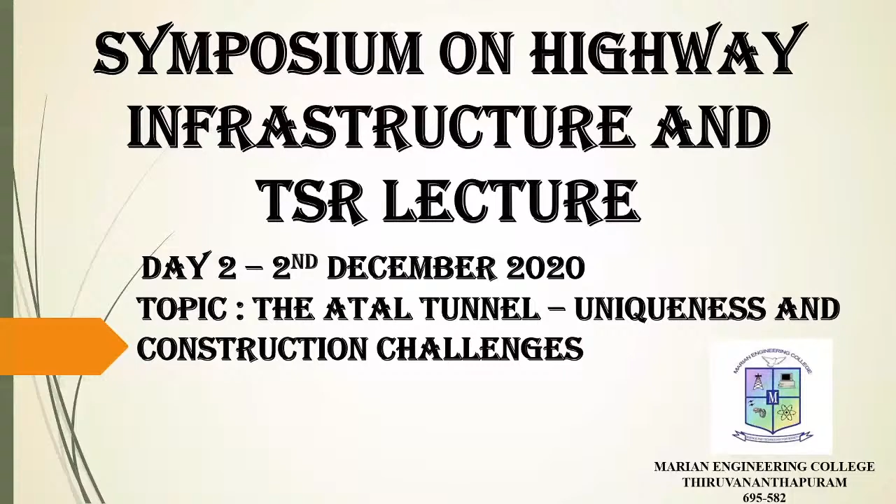As I mentioned earlier, today's session is on the topic the Atal Tunnel: Uniqueness and Construction Challenges, handled by ER Sunil Vasudevan, who is the PMC of the Atal Tunnel Project, a techno-legal expert and former CEO of D2 Consult Australia, and will be chaired by Dr. K. Balan, President of IGS Trivandrum Chapter. He is a postgraduate in geotechnical engineering from University of Kerala and has specialized in subsoil investigation and design. He has designed and executed several projects using natural geotextiles. Currently, he is the Vice President of Rajdhani Institutes of Science and Technology, Trivandrum. This session will be co-chaired by Tinu Krishna S., Vice President of IGS Student Chapter, Marian Engineering College.

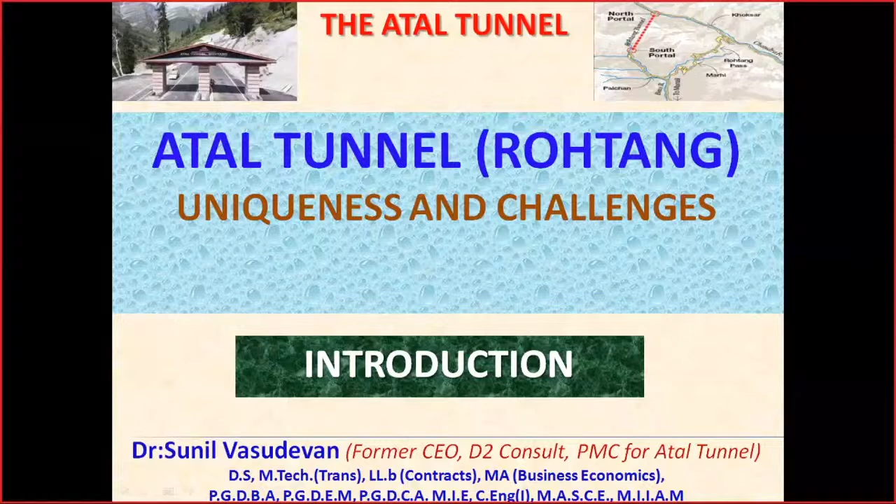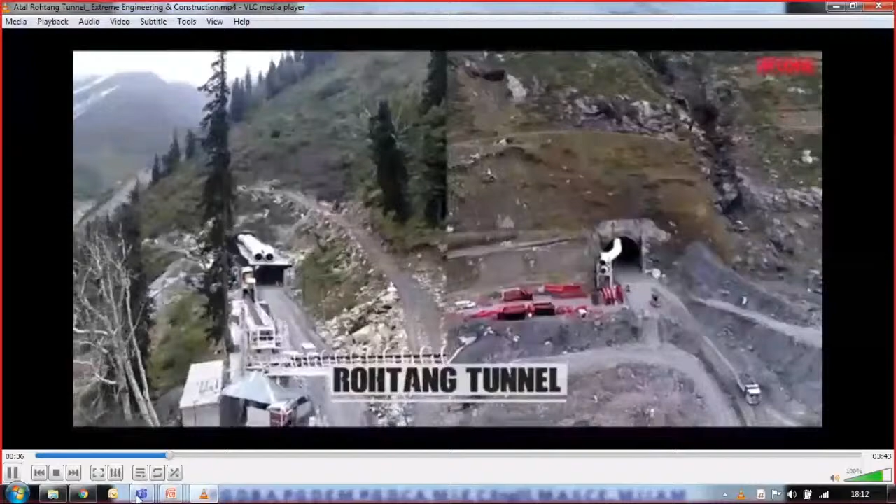Let's begin with a video, just as an introductory video. Here we go. I hope you can all see the video. There's no sound for the first few seconds. It's about a 3-minute, 45-second video produced by the contractors of the Rohtang Tunnel—one of the contractors, of course. Something went wrong with the video, I'm sorry. We'll come back to that.

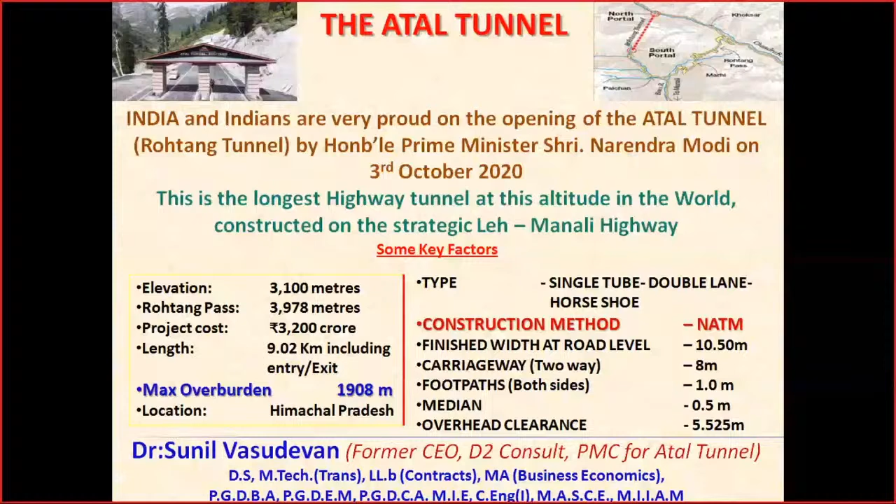This picture shows the finished tunnel—you might have seen this in videos or on public platforms. The Prime Minister inaugurated it. This is the first entry. This is what I think you might have noticed mentioned about snow galleries in the video. This is a snow gallery constructed just before the entrance of the south portal, to prevent snow from covering or blocking it. You can see it comes like this and takes a sharp right turn and goes inside. This is what you see inside now.

So in the small figure also you can see that the road comes here, takes a sharp right turn, and goes across under the mountain.

This relief map gives you a 3D idea about what we have just seen in the video. This is Manali town, and from there about 14 kilometers up we have the tunnel started. This place is called Palchan, from where the present road is. From there you take a right turn and go winding up, go down. This is the Rohtang Pass, the topmost portion. Then go down to the other side and go like this to Leh. So that is the route.

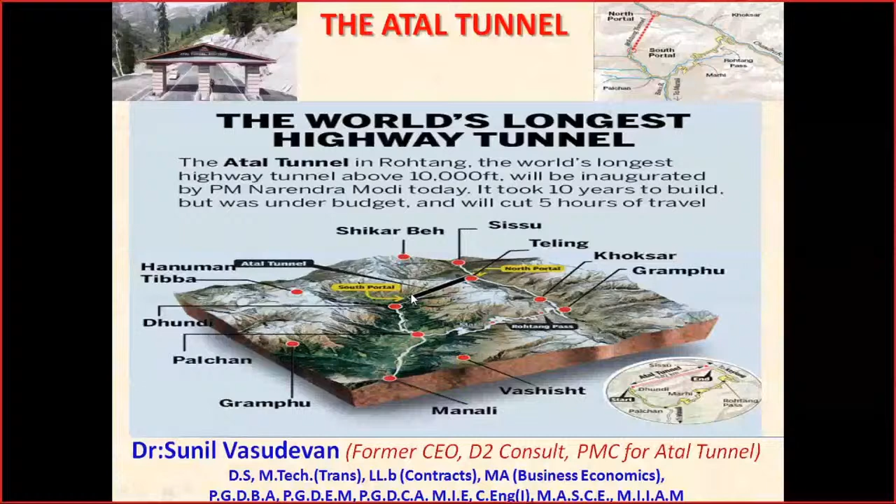So let's have an overview of why this tunnel was made. This is on the Leh-Manali highway, which is number 3, and socially, strategically, and from a national defense perspective, it is very important.

This is crossing the Pir Panchal ranges. The ranges of Himalayas we cross here are called Pir Panchal. Earlier it used to take 5 hours to cross this 46 kilometers, but now you can just zip through in 10 to 15 minutes. So that is the benefit of it.

It is not only beneficial for the general public, it's also very important for our defense purposes. So this tunnel is strategically and defense-wise also very important.

The idea was mooted in 1960 itself, when Jawaharlal Nehru initially thought about this. When the Jawahar Tunnel from Jammu to Kashmir was made, even at that time this was considered. Even the Geological Survey and many other agencies surveyed this and prepared basic feasibility reports.

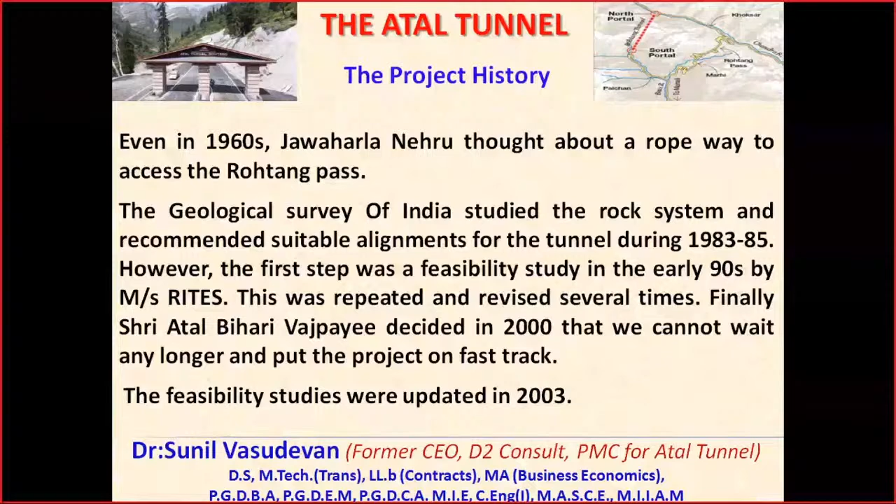And again, it was given to RITES for a feasibility report. But in 2000, our then Prime Minister Mr. Atal Bihari Vajpayee decided that we cannot wait for studying, we cannot sit on it, we need to do it very quickly. So he set up a special project under the Border Roads Organisation with a chief engineer to head this. Based on his decision, the feasibility studies were updated again in 2003.

So the final feasibility study and the DPR for the tunnel were provided by SMEC of Australia, and then this went to bid, and the contract was awarded to Strabag Afcons JV. Strabag is an Austrian contractor. They have done hundreds of tunnels in the Alps. The Alps are climatically more or less similar to the Himalayas, the tunnels built there in snow and very tough conditions, except the geology - which is different. So SMEC were the design consultants, and also appointed as advisory consultants during construction.

The project, as I told earlier, the project management consultancy was entrusted to D2 Consults. I was the CEO of D2 Consults, with my office in Delhi.

So the construction started in June 2010 with the first blast. Our then Defense Minister Mr. A.K. Antony, along with Mrs. Sonia Gandhi, was present for the function.

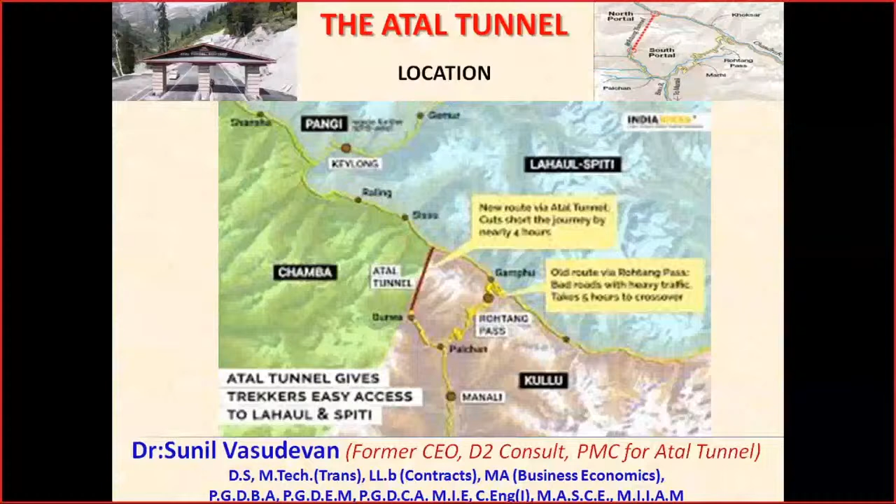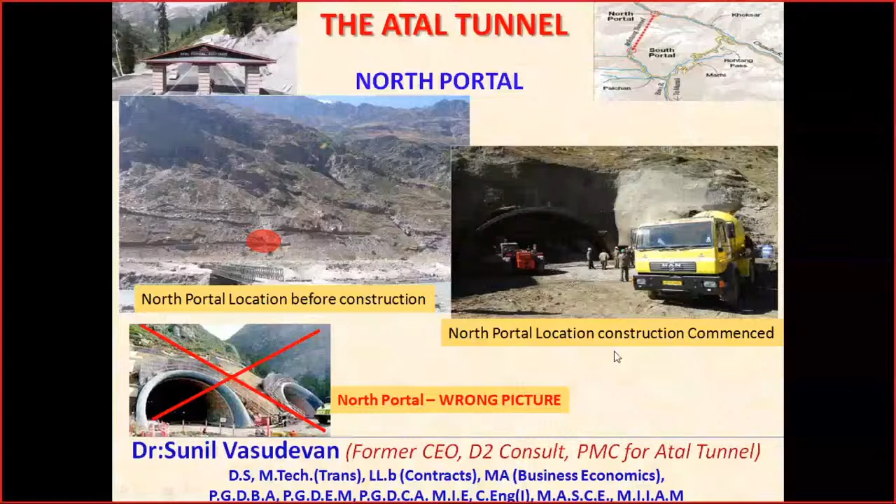This is the longitudinal section of the mountain where we have built the tunnel. It starts from the left side. This is the South Portal, and this is the North Portal. This is the tunnel. So what you see here, you would understand how much overburden is over this. It's huge. The maximum overburden is...

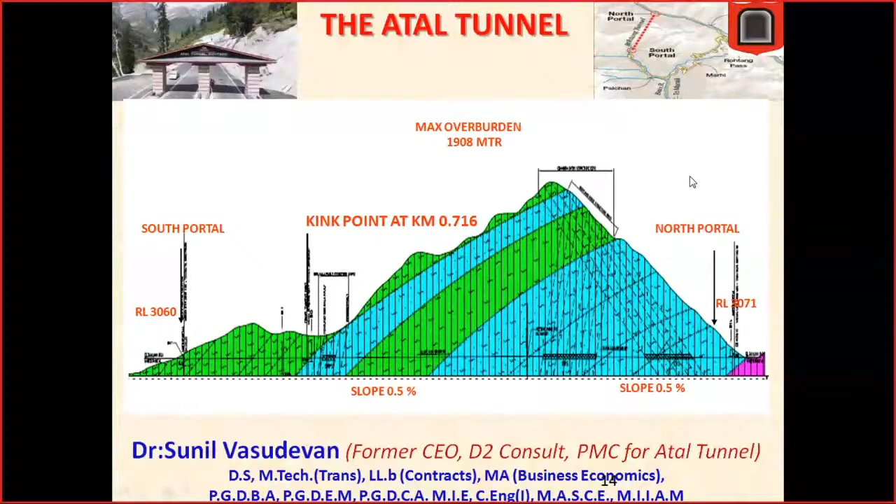1,908 meters at this point, which means almost 2 kilometers of mountain stands above the tunnel at this portion. This is not very common in tunnels, only in some, not all tunnels. Also, the geology is very treacherous. We cannot predict what's going to happen when. So that is one of the major challenges.

These are also some technical matters, just for academic or statistics purposes. The maximum overburden is this. I have included this so that if anyone wants to refer to it at a later time, you will get some statistics.

So let's talk about the challenges we faced. One is high altitude - okay, we can tackle it, no problem. Inclement weather, we can tackle to a certain extent, because it's either snowy or rainy. I don't think there is even a single day without rain or snow. It's always wet there.

The speciality of this location, the Manali, Himachal and Himalayan region, is that the weather changes any moment. At 9 o'clock you'll see good sunny weather, shining like anything. Within 15 minutes, you'll see clouds gathering in the sky and either a snowfall or rain coming. So it's the most unpredictable weather conditions there, and we have to be ready for everything.

Heavy snowfall is another challenge. Winter starts from mid-October or November and continues up to mid-April. So these 6 or 7 months, it's severe winter, and December, January, February are horrible. I'll show you some photographs later so you get a feel of what the Manali area looks like in winter. Then another challenge is that the area is prone to avalanches and landslides, because of the geology and the climate both.

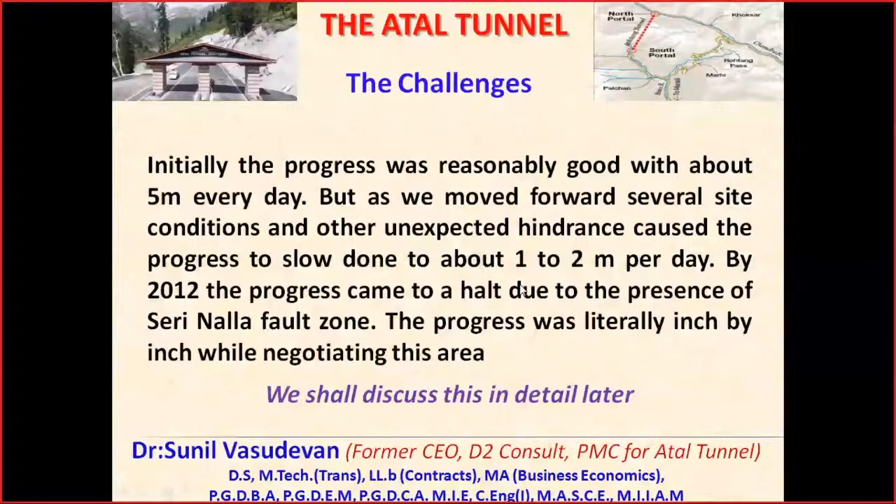Suddenly, one day after a blast, there was a big flow of mud, water, and everything. Nobody was injured, there was no casualty, but from that day onwards, the progress was almost nil for some time. We couldn't even move an inch. Then we tried a lot of modern technical methods, consulted many experts worldwide, internal and external, geologists, everybody. Slowly we resumed construction, and the progress was literally inch by inch, where we used to blast and go 5 or 10 meters a day. Now it is about half a meter or a quarter meter, something like that. Anyway, I'll discuss it later.

As I said earlier, one of the problems was heavy snowfall. There were many occasions when staff had to be evacuated by helicopter because they got caught. The road, because of an avalanche or snowfall, gets closed, and workers, officers, or staff get caught on the other side, so we had to get the help of helicopters.

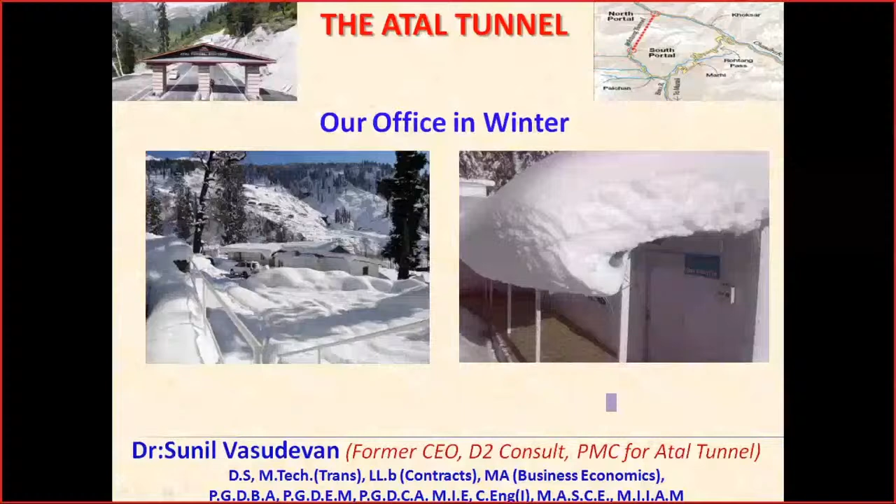This would give you some idea of how we were living or going through the winter season there in Manali. The left side is our office, the office of the chief engineer and the officers of the Border Roads Organisation. On the right side, you can see this snow lying on the roof is just one night's snowfall, not accumulated through days, just one night. Yesterday it was clean, and today you could see this much, more than a meter high snow. So this is the condition there.

This is how Manali town looks. The earlier pictures I showed you were our office, which is around 14 kilometers from Manali town and about 1,000 meters above Manali town. This is Manali town, and this is how the people of Manali town live in winter, just to give an idea about it.

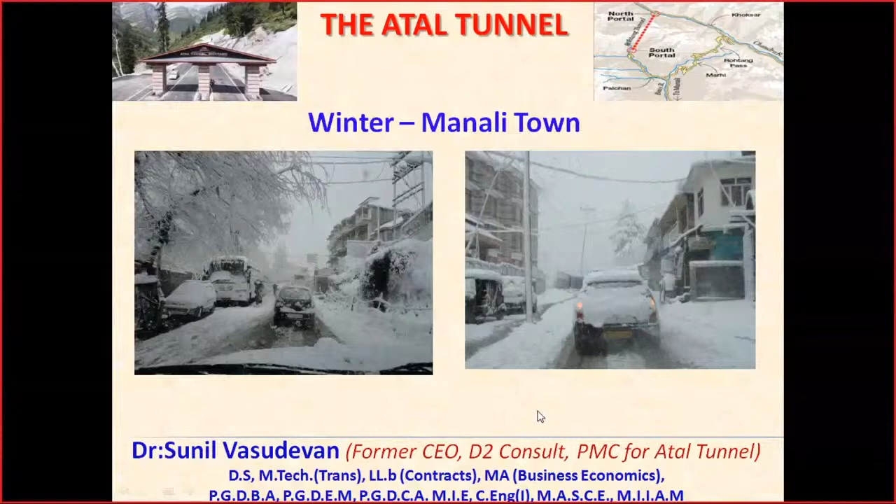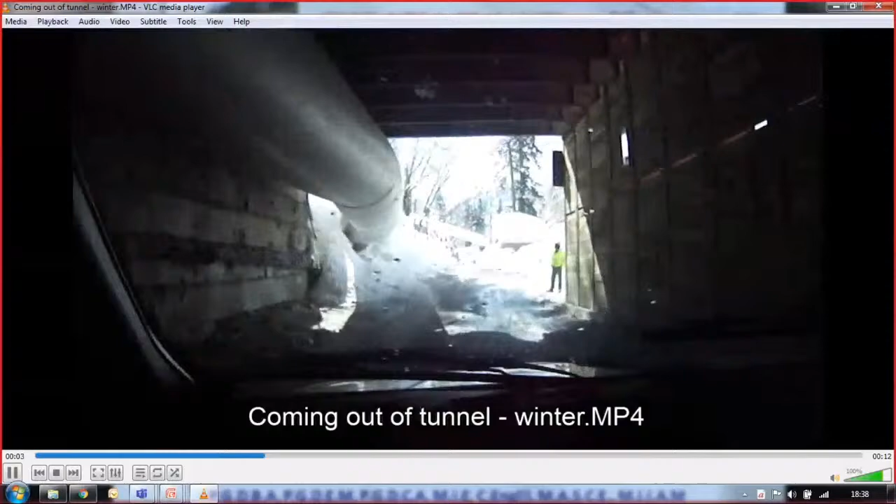This is the road going to the tunnel, and now see the difference, how different it is inside the tunnel versus outside in winter. This video comes from outside the tunnel in winter. I hope you got an idea about the winter there. Inside the tunnel it is very hot and humid, while we wear sweaters and many layers of woolen clothes outside. Once we move into the tunnel, we start sweating, so we have to remove all these things. That is the change.

Now let's talk a little about the geology. I think yesterday in a presentation, the expert talked about the formation of the Himalayan mountain range, created as a result of the push between the Indian plate and the Eurasian plate, the two tectonic plates. They say it started about 50 million years ago and continues even today. 225 million years ago, India was a large island near the Australian coast. It moved into the Eurasian plate and hit it, slowly pushing toward the China side, and the bulge formed is the Himalayas.

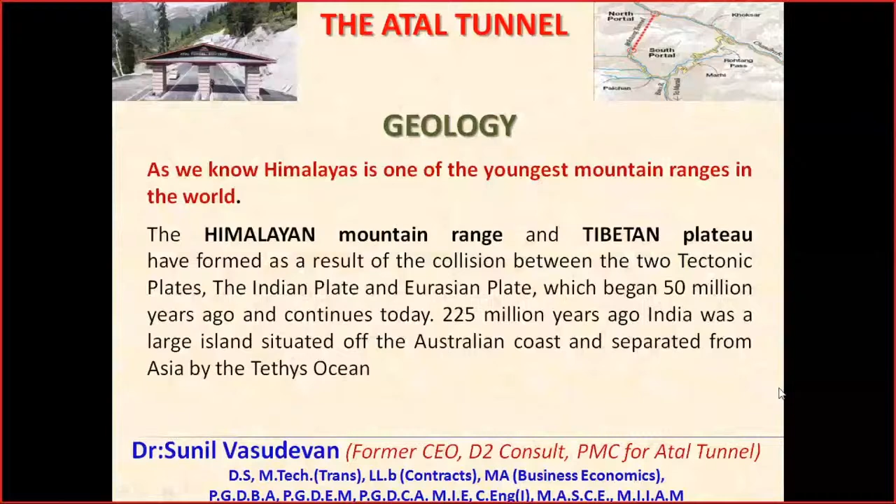It's called one of the youngest mountains because it's still growing, maybe still in its infancy, whatever it may be, but the height is still increasing. That is what we could read in the public domain.

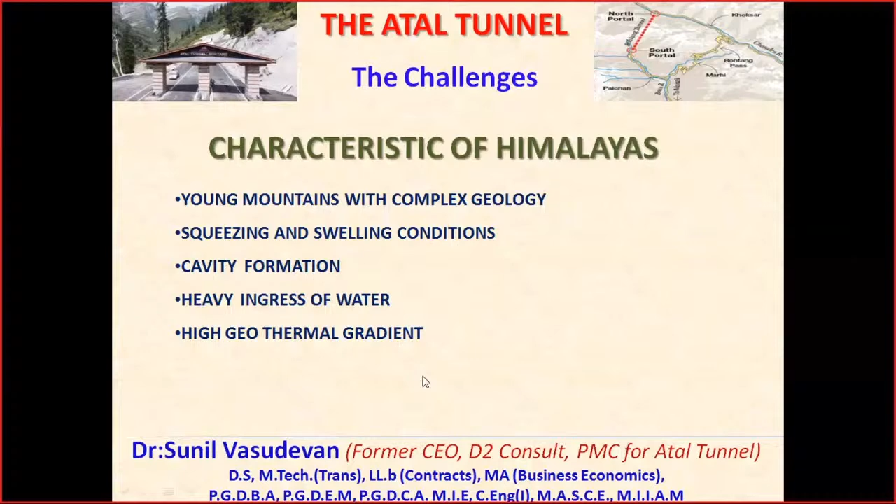The geology of this location consists of quartzites with schist, quartzite biotite schist within dense phyllites. This forms the geology of the mountain in this area. The characteristics are very complex because squeezing and swelling conditions are a big issue, along with cavity formation within the rocks due to shattered and sheared rock. The ingress of water and the geothermal gradient is very high; it increases very steeply.

Now let's talk about the Seri Nalla fault. The present Seri Nalla fault is at about chainage 2 plus 250, that is 2.25 kilometers inside the tunnel, about 250 meters above the tunnel top. What happens is the ground under the Seri Nalla has shattered and sheared rocks and gravels, and water seeps through it. A fault zone is formed, and the tunnel crosses through this fault zone. So from this chainage 2 plus 250 onwards, water from the stream above comes into the tunnel, carrying a lot of mud, rock, and everything else.

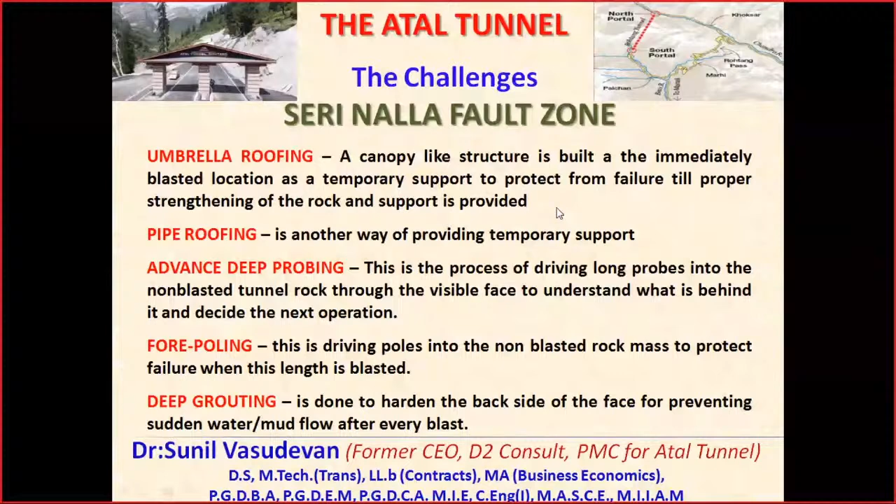So the problem we have seen is that the rock quality is very poor, as I told earlier. The highly fractured rock mass with a number of shear seams and shear failure. And the geological discontinuities have also caused a problem, as they are parallel to the tunnel axis. So when we are driving like this, these discontinuities or faults are parallel to it. That is creating a lot of problem, because we have to take care of it all along the way.

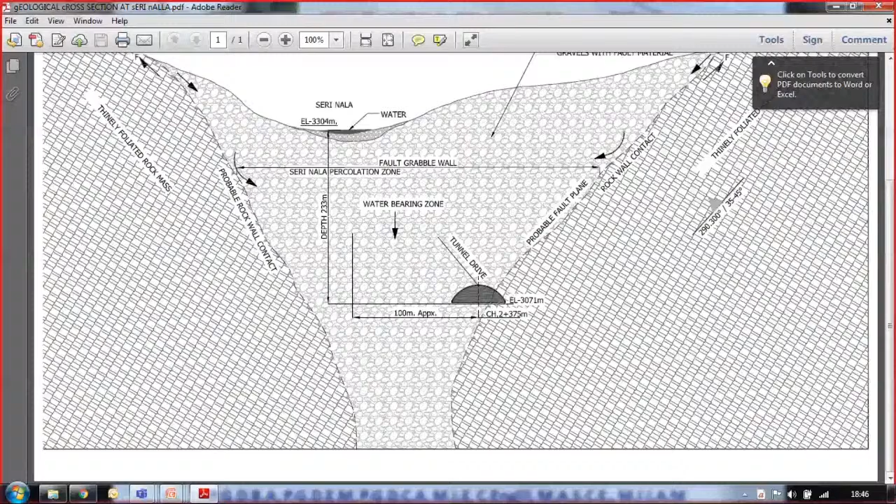So we have our tunnel somewhere here. So all the water seeping through this gravel and everything enters the tunnel at this location. This was the problem we faced.

Now let's discuss in a few words about two different tunneling methods. Maybe students who are interested in tunneling as a subject may be interested in this. So basically we have two tunneling methods. One is the TBM method, done by a big machine called tunnel boring machine, that is TBM.

So this method is very costly. And then this is the drilling section, and behind it what you can see is a lot of other things going on behind this.

That is, even this is drilled, and through this the muck comes out. Trucks come inside, and muck is taken away by all the trucks, then other trucks bring in the linings, and these concrete linings are fixed as the last thing. So this is gradual, the whole thing gradually moves forward.

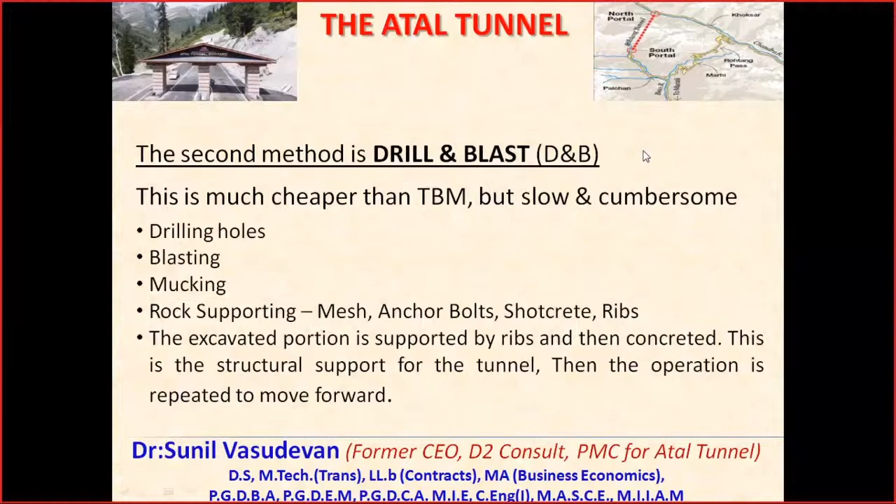Now when you come to the New Austrian Tunneling Method, that is NATM, this is a particular or modified type of drill and blast. Even though it is called the New Austrian Tunneling Method, there are other names for it also, like sequential excavation method or sprayed concrete lining method.

What is important from the engineering viewpoint is that in the normal drill and blast method or TBM method, the load of the surface or rock mass is taken by the structures we build after drilling it, after making the hole. But here in the NATM method...

It utilizes the strength of the rock mass itself, like an arch. The arch supports by itself. You can just do a brick arch, just like the arch shape, and that is what supports the whole structure. So the rock itself takes care of the stresses. Whatever support we give is temporary, to prevent falling of rocks and loose materials. There is no structural support given in the NATM method. So this is the peculiarity or speciality of the NATM method.

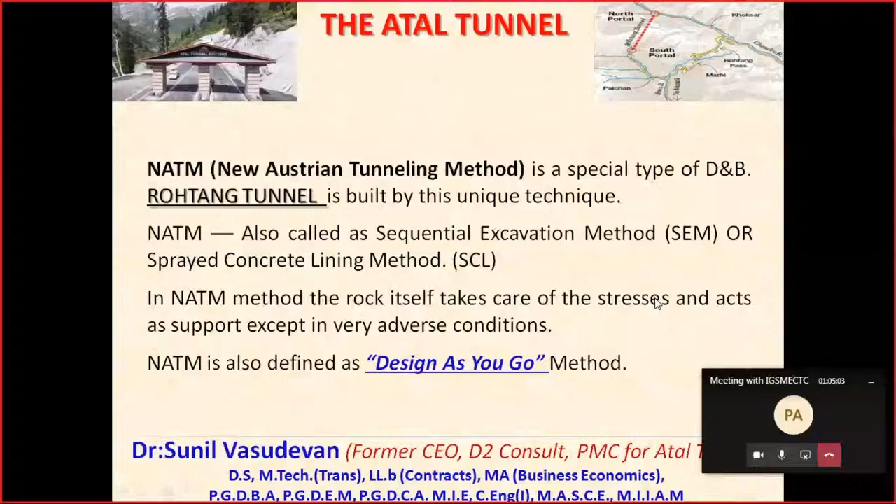Another thing is that NATM is a design-as-you-go method. Usually in tunneling, what we do is design in advance, every cross section, decide everything, and just go. But here, there is no detailed design done first. The tunnel alignment and design, typical designs based on the borehole logs, borehole details, and the geological investigations, classify the rocks into different classes - 1, 2, 3, 4, 5, 6, like that.

So in Rohtang, the earlier classification was 4 types of rocks. So for these 4 different types of rocks, you design typical cross sections. This is what the preliminary design, or what you get in the DPR. The actual design is done at the site along with the construction. That is why you call it the design-as-you-go method. You design as you go.

So how is this done? What happens is that the geologist, the geotechnical expert, the tunnel engineer, the authority, the engineer, the client, and the contractor, the project managers or team leaders or engineers of the client - all these, a team is formed, about 6, 7, 8 people of the contractor, the consultant, and the client.

The design consultant, construction supervision consultant or PMC consultant, and client - all these people form a team, and this team of experts inspects the tunnel face. They inspect the already excavated place and generate an opinion about what kind of support should be given there, and what we should expect after the next blast. This is what they decide.

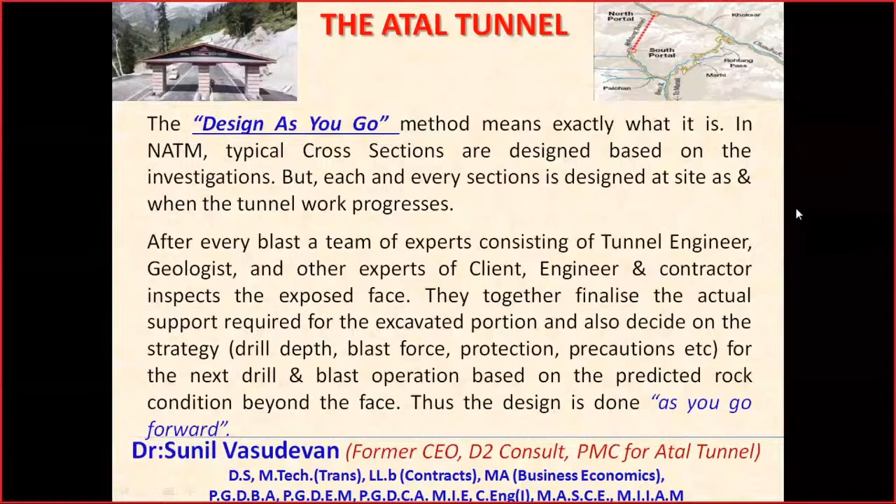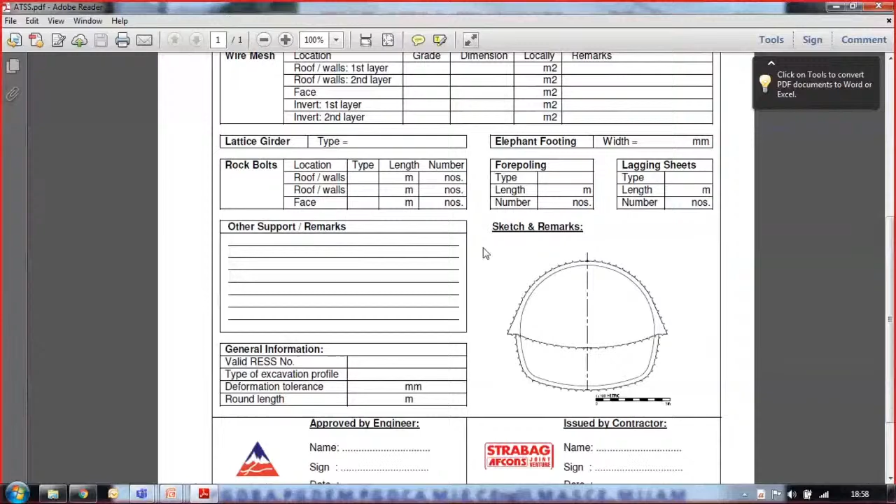And after blasting, there will be a little bit of change as per the actual conditions. Then they fill in another form, which is the Actual Tunnel Support sheet. This is also filled up and signed by all the parties. So this is a record of what they decided to do and what they have done after this. The second one is a kind of as-built record.

So let's discuss the sequence of methodology in NATM tunneling. First, as I said earlier, after drilling and blasting, the rock mass takes the support in the form of an arc, and then to give full support for the section, a quick closure of the invert is essential.

This is a very important factor in NATM tunneling. The invert means the bottom part of the tunnel. You cannot wait for several days - within a few days you will have to construct the bottom portion so that the entire ring is formed to take care of the loads.

First we blast here and the arc forms on top, and as early as possible you construct the bottom of it also, so that the whole thing forms a ring and takes care of the load.

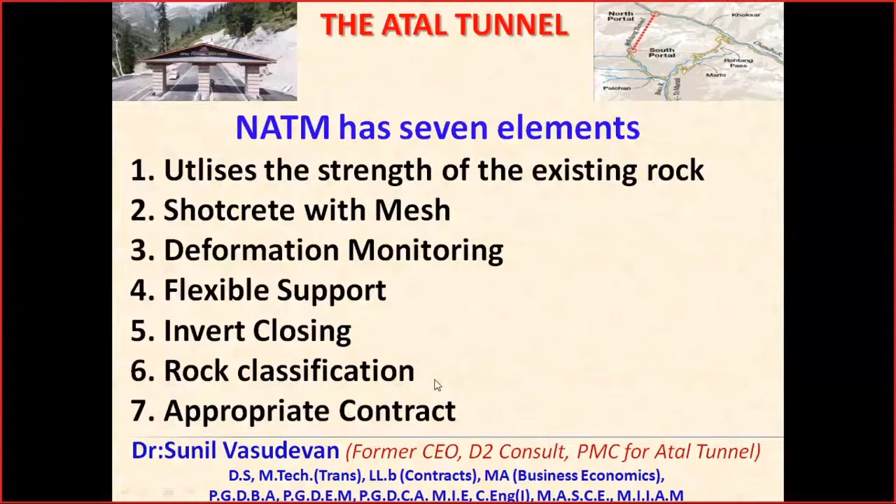So these are the 7 different elements which I mentioned earlier: it utilizes the strength of the existing rock, shotcrete with mesh, deformation monitoring, flexible support, invert closing which we just discussed, and rock classification which we also discussed. Then appropriate contract - utilizing the strength, relying on the inherent strength of the rock mass, which we discussed earlier.

The shotcrete protection is that immediately after blasting, we fix a normal wire mesh, as you've seen in homes where wire meshes are put, simple wire meshes, maybe a little thicker. You fix it to the surface of the blasted area, then concrete is pumped at high force through nozzles, which is called shotcreting, and it sticks onto this so that the wire mesh and concrete form a kind of support to the roof.

Remember, it's not a support for the entire rock mass above the tunnel. It is just a support to prevent falling of loose or cracked materials. These are all called temporary support.

Then we put steel ribs or anchor bolts, and a lot of other things depending on the type of rock we encounter, to give temporary protection. After that, finally, when the ring is closed, everything is fine - that ring will take care of the entire rock mass over the tunnel.

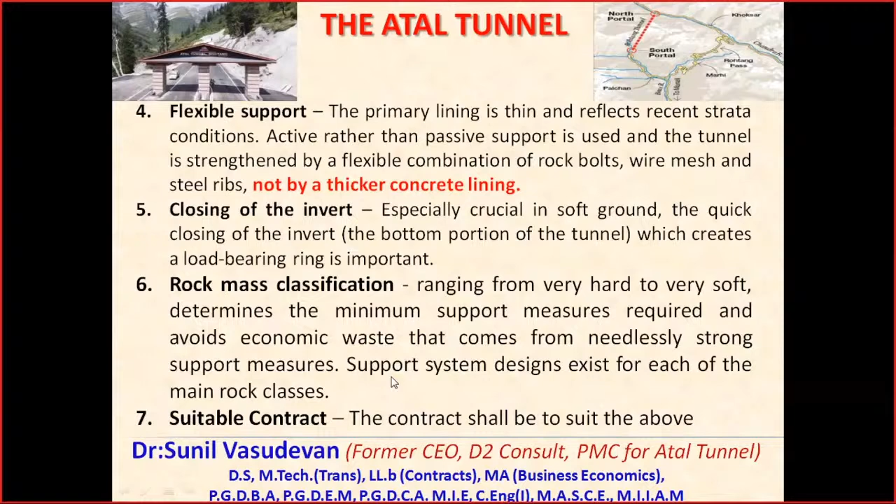Correct rock mass classification is important from the geological point of view. If we wrongly classify it, we will encounter all sorts of problems. The last and seventh point is suitable contract, because the contractor is very much responsible during construction, not just ordinary contracts. So even in design or decision making, he has a very, very important role. The contract has to be framed to suit that.

Now let's see the operation cycle. First, as we said, the team goes and inspects the rock class. Then they take a decision on drill depth, number of drill holes, the location of the holes, and the explosive strength, that is blast charge strength. Then you drill it and blast it.

After blasting, everybody comes out during the blasting. After the smoke and dust settle, people go in. The first team goes and does the safety inspection. If everything is safe for workers to enter, then clearing of the muck starts with machinery.

Again, after clearing of the muck, the joint team of experts inspects it. They decide on the actual support for the portion just blasted, and decide the required support for the next excavation. Again it starts from deciding the next drill depth, number of holes, and so on. So this is a cycle. Usually in a day there will be 6, 7, 8, or even 10 cycles like this, depending on the rock condition, climatic condition, and everything working fine.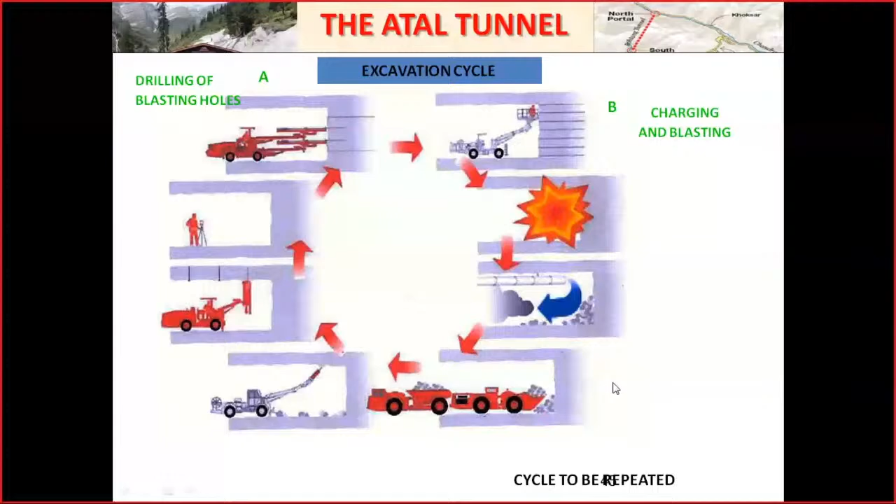It's very quick. This is a pictorial representation of this excavation cycle, which we have seen in the previous slide. This is another way of showing it - the same 13 operations, just in different figures and different ways.

Now let's see how the tunnel face is inspected by the experts after a blast. I'll show you how they do it. You'll get a feel for how these people go inside and inspect.

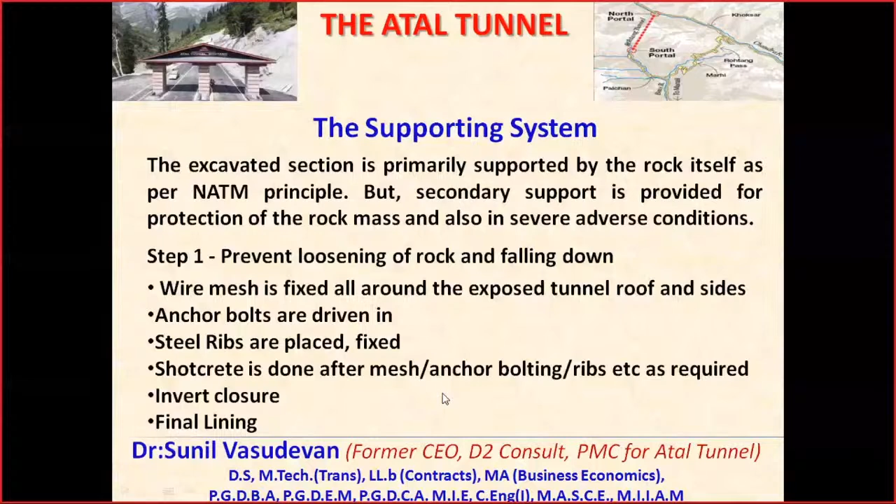It's very interesting, I would like to comment here. In Rohtang Tunnel, when we construct - of course this is a construction in India - we could see at least 50 to 100 workers working inside the tunnel every day. A team setting these machines, another team filling with explosives, another team fixing meshes, and like that.

But when tunnels are constructed in European countries, I visited many tunnel constructions and participated in Austria, Germany, and places - it surprised me. Only less than 10 people do the entire work. The same guys drive this huge machine, come down, get down, take the other seat, drill the hole, then move the machine back, then he and his teammates come and fill up the holes with explosives, do the wiring, drive back, blast it. After that, they themselves come inside driving trucks, carry the muck away, like that. It's only 10 people doing the whole work.

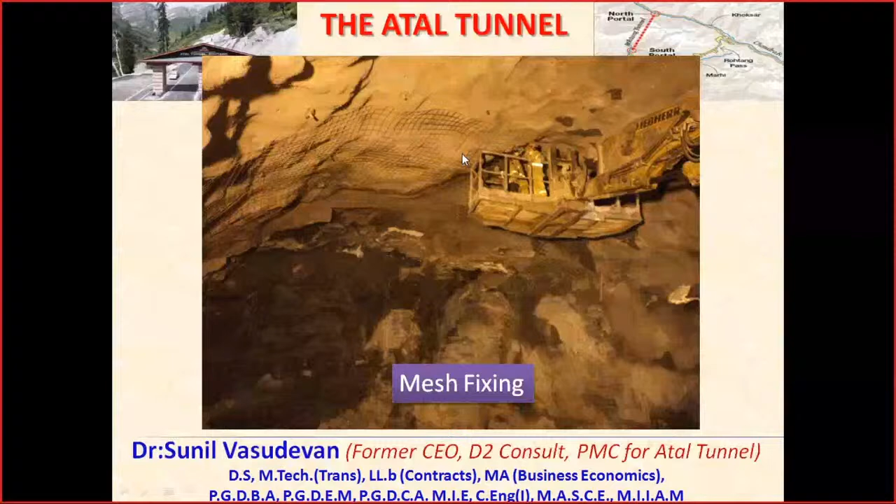We will do the shotcreting like this. Concrete is pumped, loose concrete is pumped through this machine, and with high pressure it pushes the concrete like a jet into the face, and it sticks there. This is where the concrete is done. Here you can see the wire mesh, and this will also be covered.

This is another picture where we show a rock bolt. It is pushed in, drilled into, and then you can see the plate of the rock bolt. This is where you can see the second shotcrete done after the wire mesh. A little bit of area is given as overlap for the next concrete.

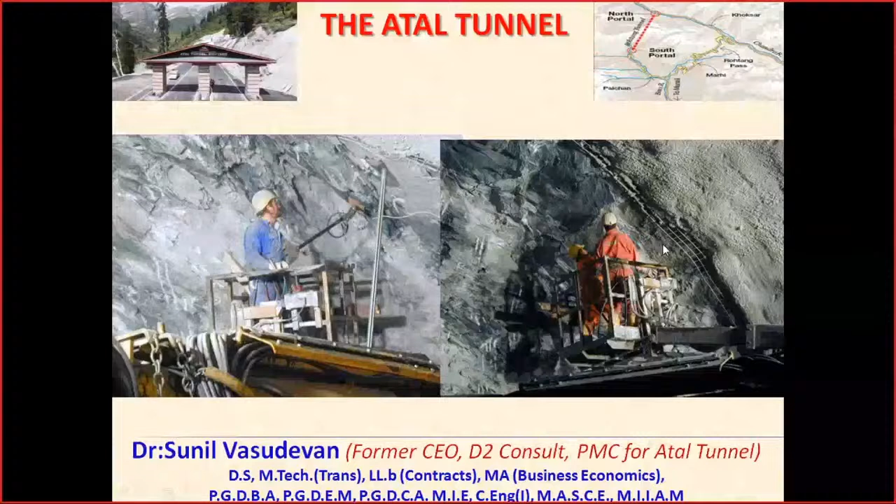This is another view. Of course, I don't know whether it is night or day because it's just like night - the darkness, 100% darkness, even during noon.

This is what we call a rock bolt. This kind of anchor is self-drilling - there's a bit at the front, and when you turn it, it screws into the rock, and there's a plate here. This plate is not very strong, it will bend when the rock moves or deflection happens. It has to move, then only we can measure the strain. So this is a typical rock bolt.

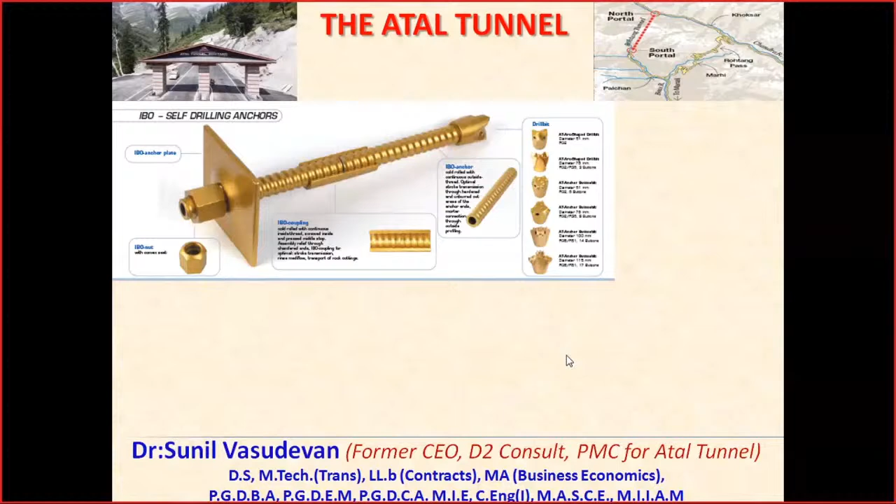This is another type of rock bolt which is called Swellex. We just push in this bolt - the steel is in a curved or wrinkled form inside. Now with a high pressure water pump, we pump water into it, and with the pressure of this water, it swells and fills up this, so that force holds the loose rock. These are all different types of anchor bolts. This is the way the anchor bolt is given - you drive inside and the loose rock mass around it gets supported.

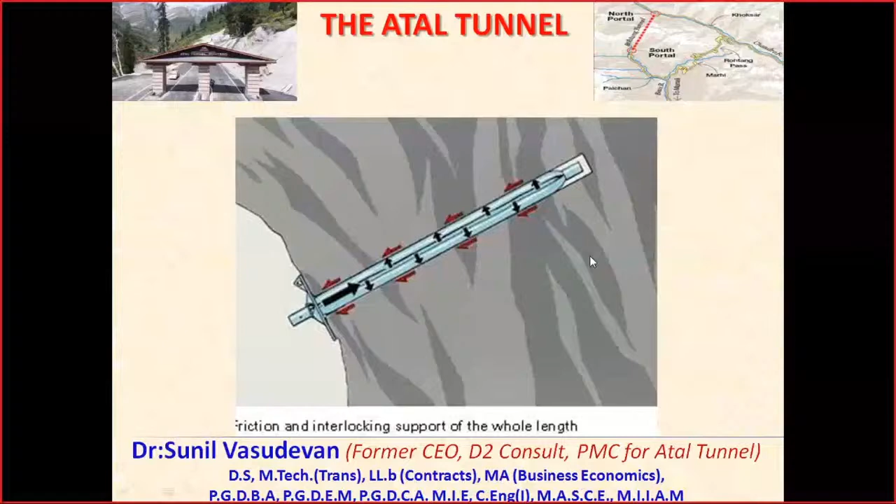As I said, there's a 3D monitoring system - you can read this later when you receive the PowerPoint presentation, time is running out. On a daily basis we monitor this, and we get an idea about how the deflection and deformation is happening, and then we control it if it is beyond the limit. So the 3D monitoring system measures the stress, strain, displacement, deflection, crack width, geometric deformation, and convergence of roof walls. This is what we measure.

So these are pictures of the sensors which we fix on the roof. We collect details from all this. We even use automatic theodolites and manual theodolites also. Not theodolites, now it is total stations. Robotic total stations and even manual total stations are used to measure this, in addition to the electronic monitoring devices.

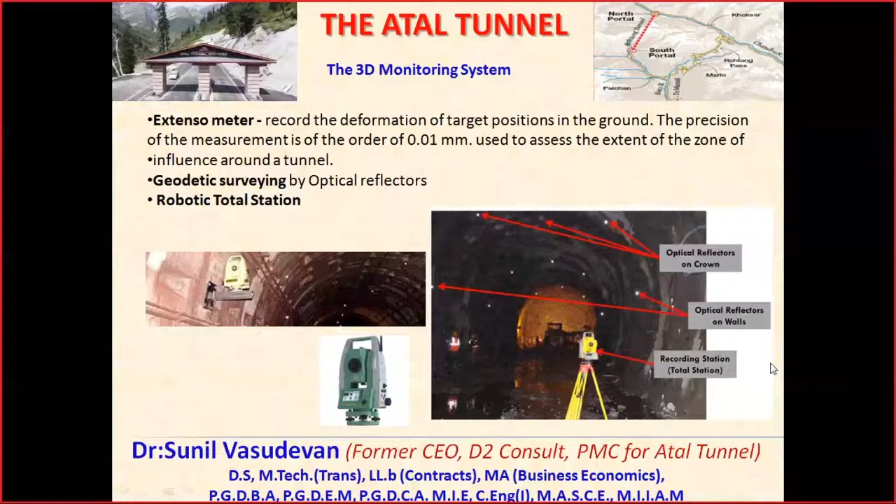These are the few equipments used for monitoring. These are fixed into the tunnel walls, electronic, and we get the data which is printed out as we saw in the previous slide.

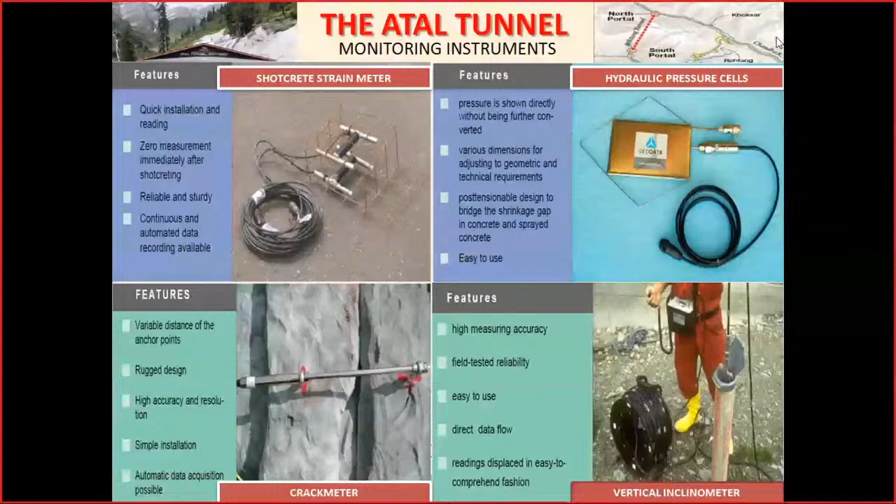As I said earlier, it took about 5 years to drill through this distance. It should have taken 5 years, where we would have taken only 5-6 months to drill through this distance of a little bit over half a kilometer. So this set back the project by 5 years. But anyway, the breakthrough occurred in 2017.

Breakthrough for students or youngsters, I will tell you: a tunnel is always constructed from both sides. So here in Rohtang also, we started it from both sides. We started drilling or building the tunnel from the north side and the south side. So from both sides, the tunnel comes in.

The alignment is perfectly done because it's not visible, just like building a road or a bridge, so you cannot see the other side. Just by the coordinates and everything, you make it perfect, and then both sides' center line will exactly meet at one point. If there is a slight error, a very, very minute error, 0.0001 error, when you go about 2 kilometers, this will become meters apart, and they will never meet.

So that would be a total failure. This is called breakthrough, when both ends, drilling from both the ends, meet at the center point and the tunnel is through at the correct alignment. So actually every tunnel construction breakthrough is a day of big celebration, very, very big celebration. So this happened in October 2017.

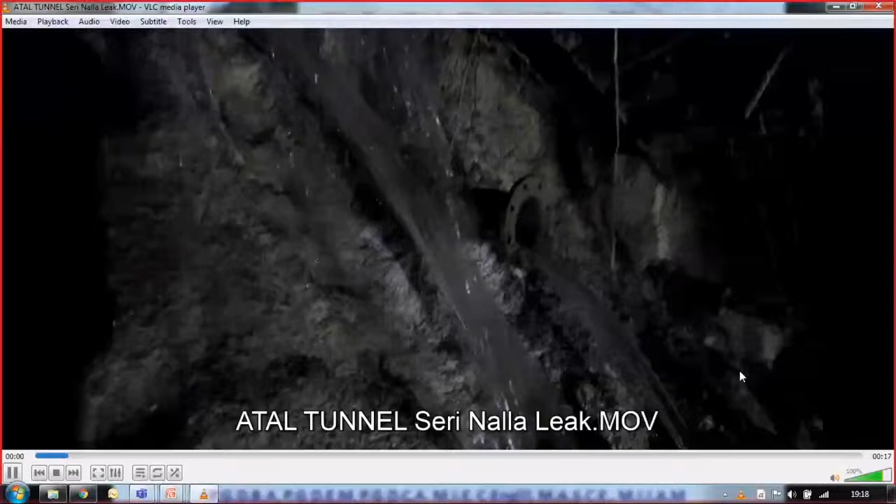This is how the flow was there. This is after the flow was controlled. Actually, on the first day we couldn't even go there. It was really bad. So this is the flow of water. Even after it is controlled, grouted, and everything, there was a lot of mud, muck and everything like that, you could have seen that.

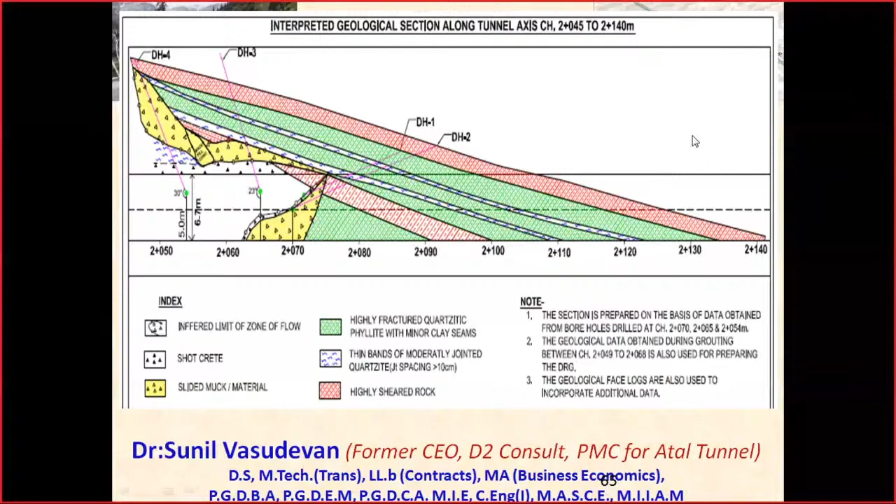This is the section where, earlier also, I've shown this picture, a photograph and drawing about this Seri Nalla here, and the rock faults, rock layers of rock and everything here. This is the tunnel we have here. This is called the interpreted geological cross section.

So I have mentioned earlier about the ways we have tackled this Seri Nalla issue. Again, fore-poling, advanced grouting, umbrella roofing, pipe roofing, all these were utilized here to its maximum. And actually, even without blasting, because the soil was so loose like mud or earth, it was not even rock, very, very soft rock, you can call it.

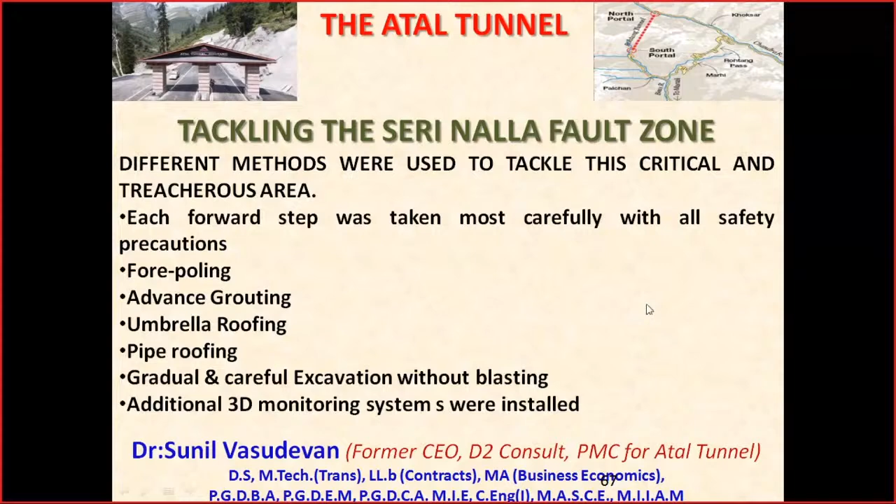So this is how the pipe roofing is done, which I have explained earlier. This kind of roof is provided. So what happens is that the span between these two pipes is so less that it will give support to the entire mass rather than the entire arch span.

This is the face where you can see the mud flow. This is something we have put here to drive grout into these holes. That is advanced grouting. These are all different supporting systems we use during this very, very slow and careful excavation.

You see the mud, water, slush, everything shown here at the face. In the earlier photographs, you had seen a very clean face. Here what you see is mud.

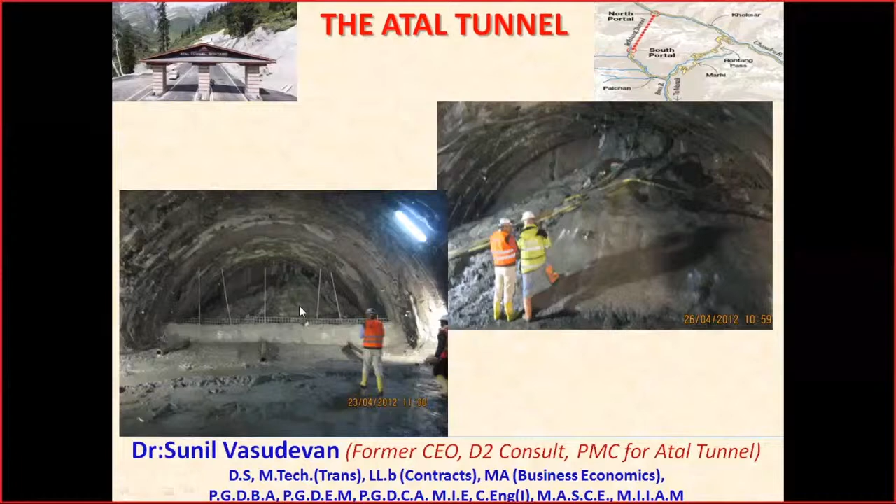This is the seriousness of it. It is really lucky that no life was lost. Actually, on that day when this happened, I was there at site, not inside the tunnel, but outside in our office. It was really frightening. I cannot even think about it right now. We were all frightened.

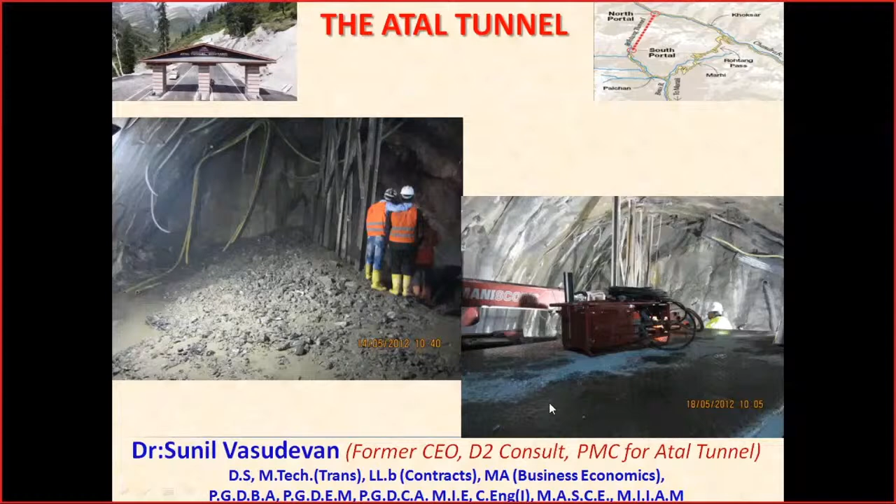These are some other photographs showing how it looks inside the tunnel. Again, grouting is done through the roof. See what you have seen in the video, water is flowing out. It's coming like this, side supports are given, a lot of things.

All the techniques and technology we can use in tunneling, rock mechanics, or any kind of engineering or structural engineering, everything was used.

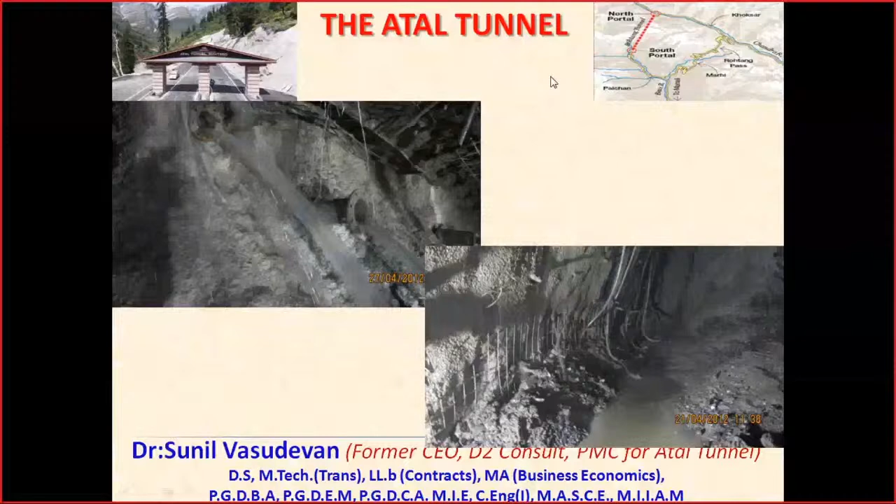See, these are the German project manager of the contractor, and these are our people, they're all there. And the Border Roads Organisation people, right from the chief engineer who is a brigadier, down to the engineer and assistant engineer level, all of them were there full time at the site.

I think time is up. I've taken a lot of time, and I'll show you a video which shows a recap of what I have shown earlier, and again what's inside the tunnel, a little more. The earlier one was about 3 minutes. This is about 6 minutes, and this will give you a good idea.

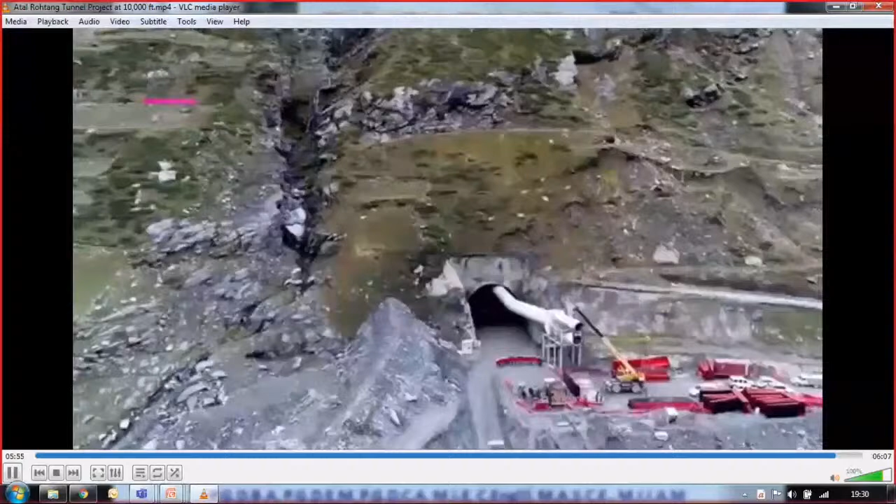So, thank you very much for listening to me.